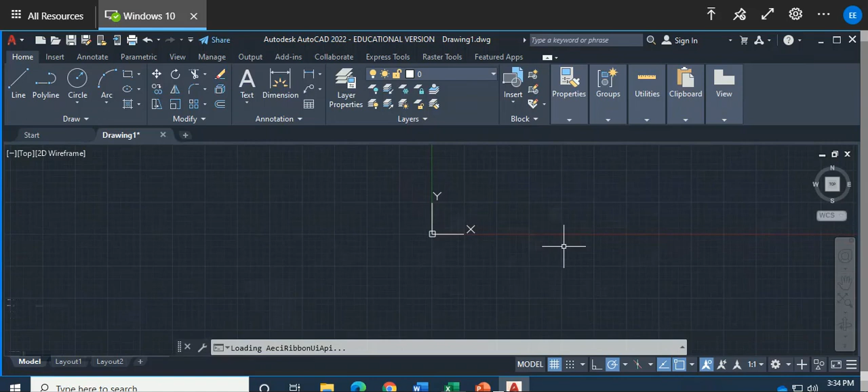Please make sure you're using inches as a unit, and also bring your reference point to 0 by dragging your cursor, pressing the thumb wheel and dragging the cursor in front of you, in the middle of the screen. This is really very helpful. If you start from the 0 point, and if it is in front of the screen, you're going to be much more comfortable and a better designer, no question about that.

Normally, the reference point is at the lower left-hand corner, and that's not the way people start drawings. We are more comfortable starting from the middle of the drawing area. So my XY axis intersection is right in front of the screen.

Now I press the thumb wheel and keep it pressed, and I drag it in front of me. If you press the thumb wheel, you'll see a hand - that's an indication that panning action has started. So you're literally panning left and right, up and down, controlling your virtual space. It's very important you develop the habit of zooming in by rolling the thumb wheel forward, zooming out by rolling it backwards, or pressing the thumb wheel and panning left, right, up and down.

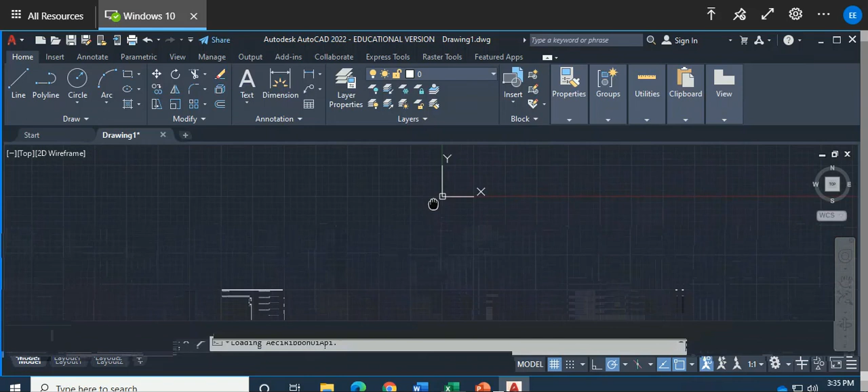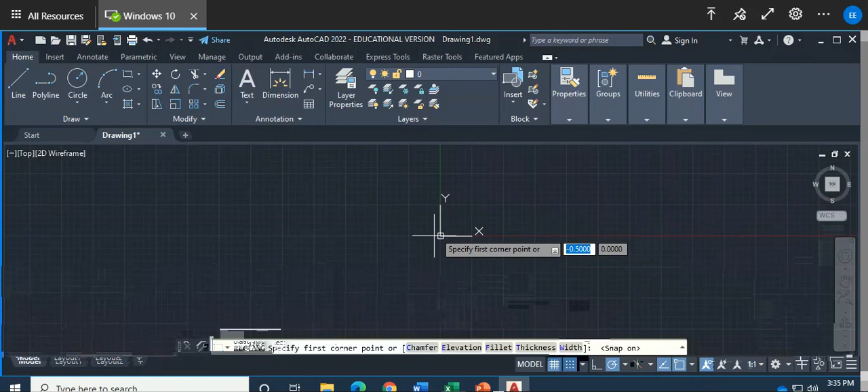So having said that, let's go to the rectangle command and start your rectangle from the 0 point. Right now my object snaps are off, so I turn on my object snap and my grid. I move my cursor right to the 0 point and it automatically shows me.

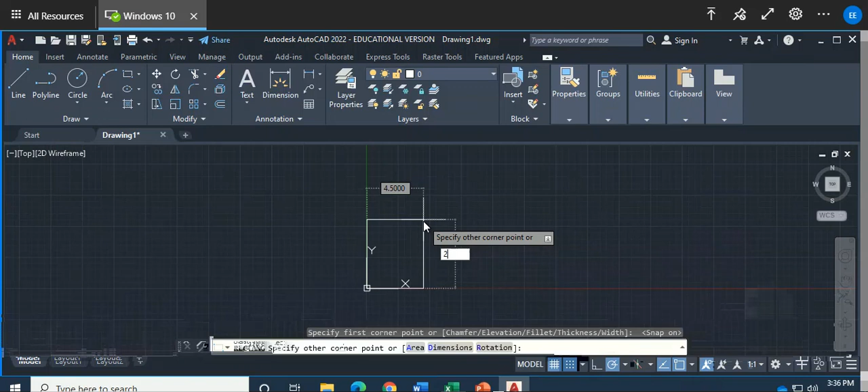I'm going to type my first name here using text. At the Home tab, there is a text command right here, and I picked the multi-line text option. I picked the top left corner and the lower right corner.

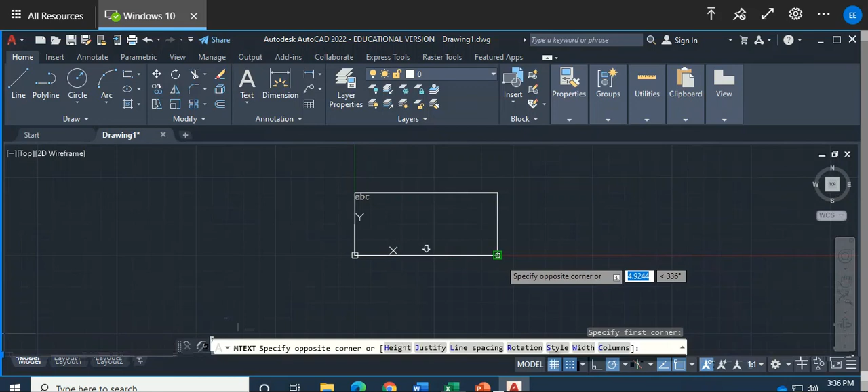Now the computer gives me a bunch of options - one is the lettering type, and the other is justification. You want to go with the center justification, and the vertical justification should be middle center. So go to middle center, both vertically and horizontally select the center.

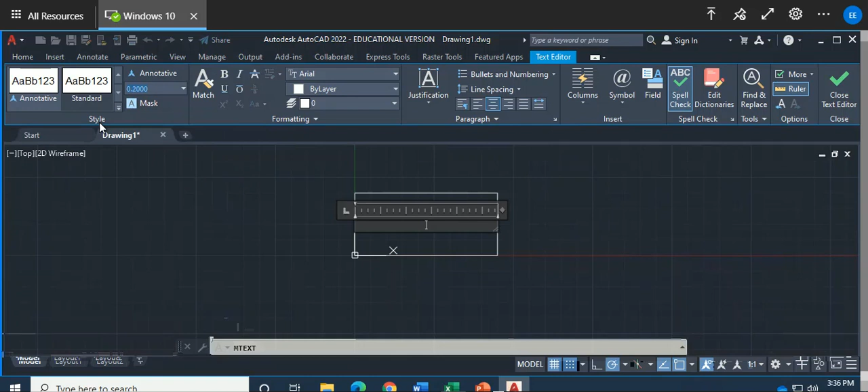We can also choose the lettering size, and I want this lettering size to be probably 0.2 inches, but maybe I'm going to change it later. After pressing enter, I am typing my first name in capital letters, E-M-R-E, to see how it goes.

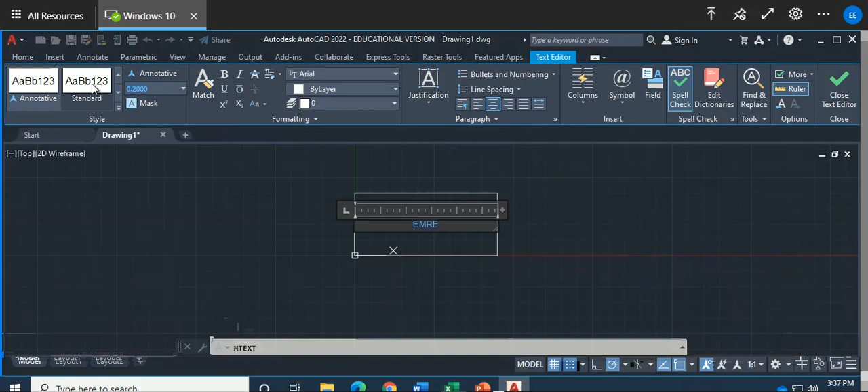After changing the size, I want to type inside the paragraph E-M-R-E, and that is kind of small. I want it to be larger. So I selected the total letter and went to size, making it 0.5 to see what it looks like. This is much better.

How about 0.75? Okay, I changed it to 0.75. How about 1 inch? I only have 4 letters. Maybe this is good, maybe this is good, I don't need too much.

I need bold face letters, and that will help. Okay, I think I like it. I think it will work for me. And close the editor. Okay.

This is good, but we're not even halfway yet. So what we want to do is make it more stylish. Maybe we're going to use the fillet command. Fillet is a very useful command to make the corners round. That definitely helps if you select the fillet command.

Select the corners to make it rounder, and the computer gives you an interactive system. As soon as you click on the fillet command, it gives you a bunch of options. One of them is the selection of the radius. So if you click on the radius, you can designate, turn off the object snap, okay.

You can designate where the fillet radius should be by picking 2 points, click and click, like that. Then select line number 1 and line number 2, and enter again. Click, fillet comes back, and then you do that again, and enter again. Fillet comes back, and then you simply draw, select. Something like this. You can use it, and now we're kind of ready.

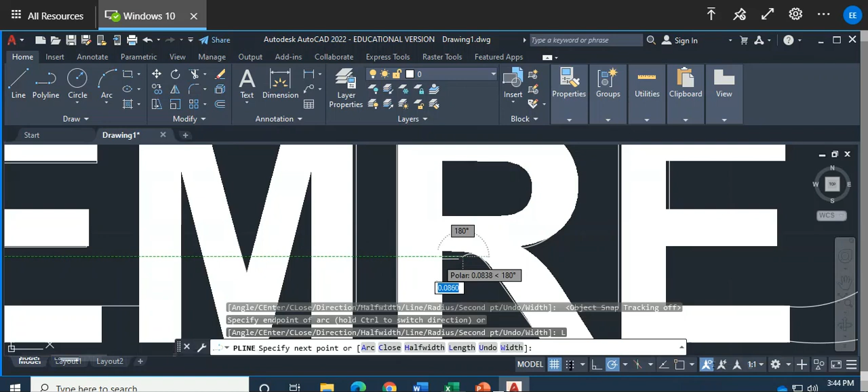And then switch to the line command. Then I feel like I'm going to do some modifications here later on. Come back here and come, okay.

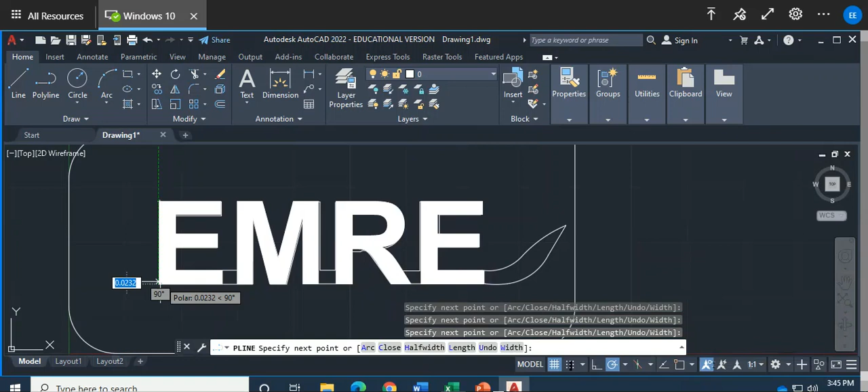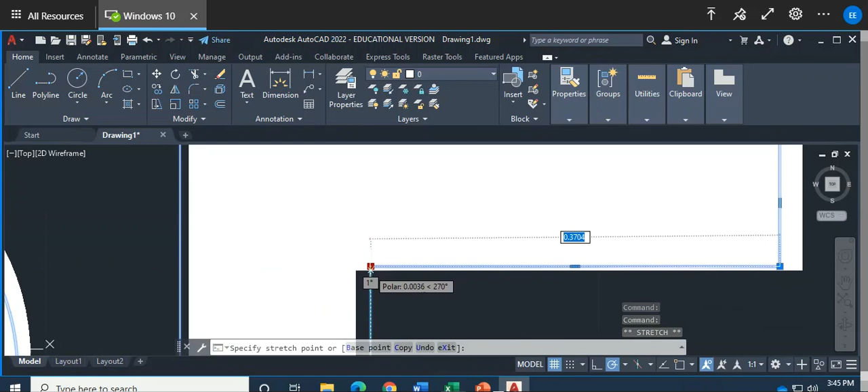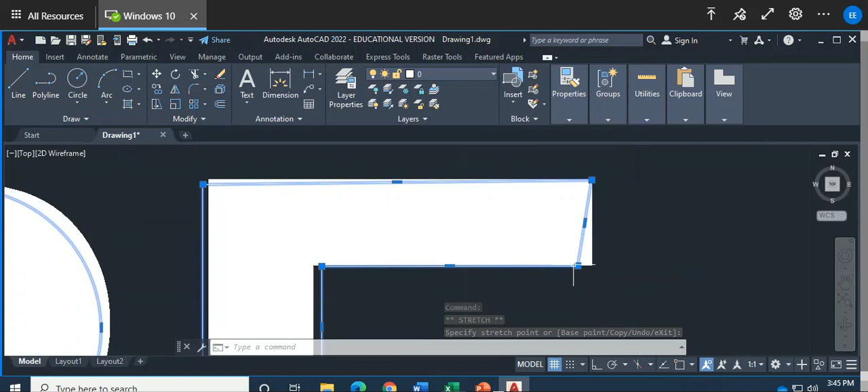Because it's a polyline, I'm going to end with the C for close. Now let's fix anything we can, and there's plenty here and there. If you selected the line, click on it, and the computer gives you the control points. Control points are the ones you can change, modify, and extend. You can click on them, they turn red hot, and then simply put them where they're supposed to be.

When you zoom in, you can see small errors better, and then you can modify it.

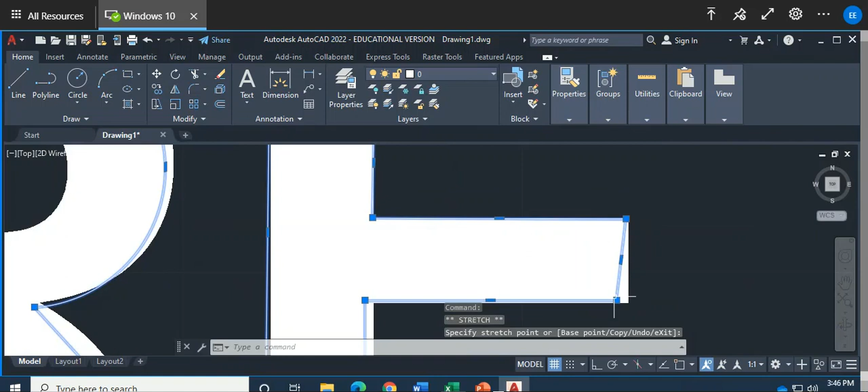You can also change it, it doesn't have to be exactly the same. You can also change some of the lines or angles of the lines to make it look more stylish.

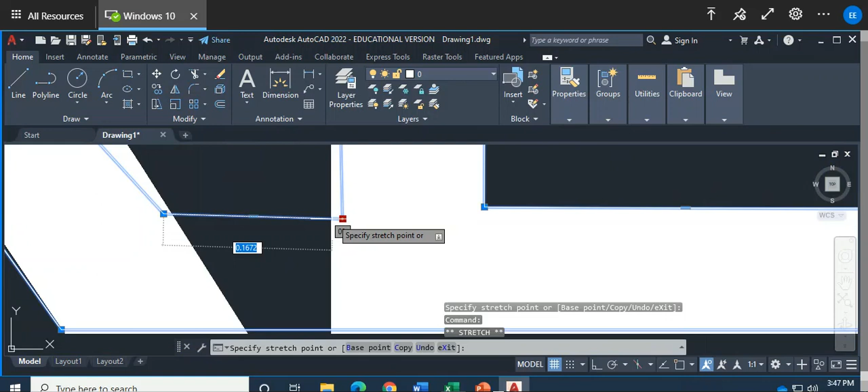Control points is pretty much everything. You click inside the blue control points, it gets red, that means you're ready to modify it. Click again, go to the place you like, and you can pull it to any place.

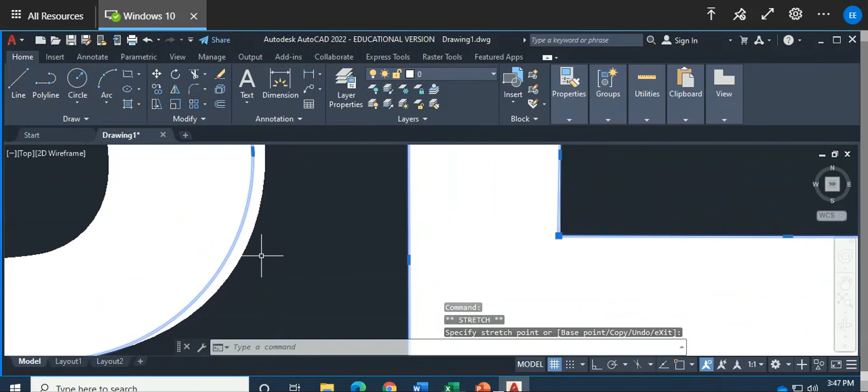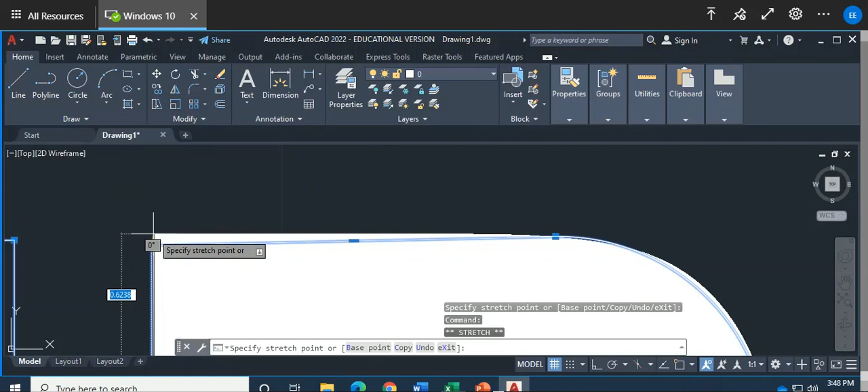Because this is an artwork, it's okay to exaggerate sometimes. You don't have to be accurate, but if you make it look better, that's the whole point.

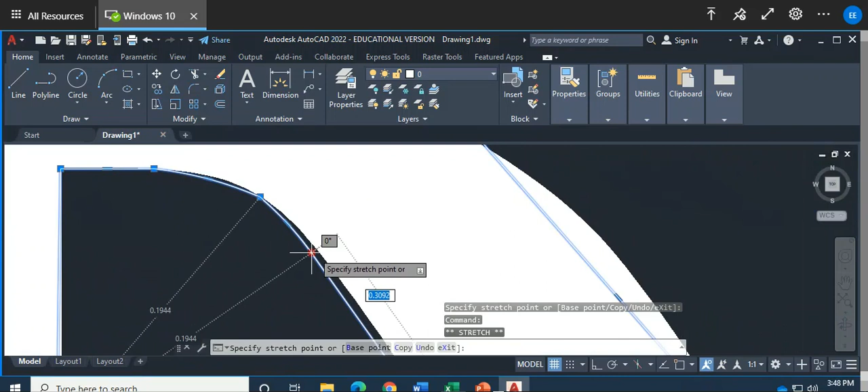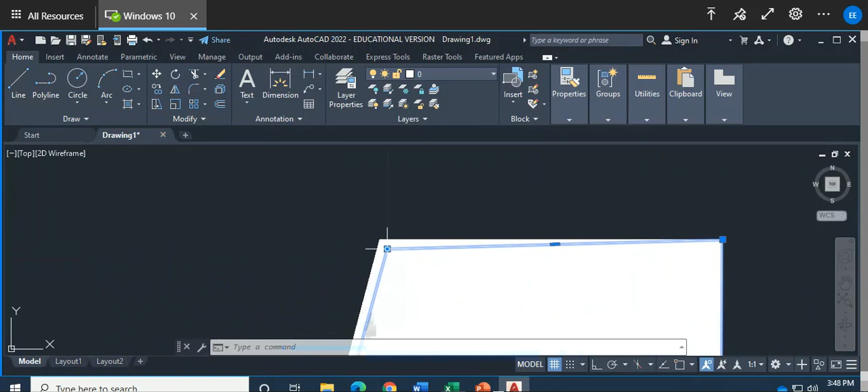Now, probably the students who are into engineering are a little bit confused. Why is it artwork if it's an engineering work? If you're an architect or engineer, or going into the architectural or engineering field, there is always the role of art, aesthetics, and proportions, aesthetic appeal in the world of engineering as well as art. And colors, the effect of colors, human psychology, being likable, is extremely important for engineers and architects as well.

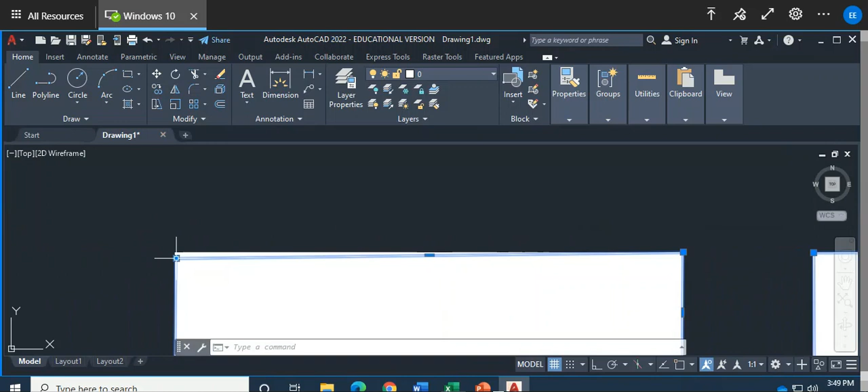So don't be confused that when you hear the word art, actually it's a good word, because there is a beauty that eyes are searching for in every single product, and you have to be aware of that fact and then try to do your very best when you're designing something totally new.

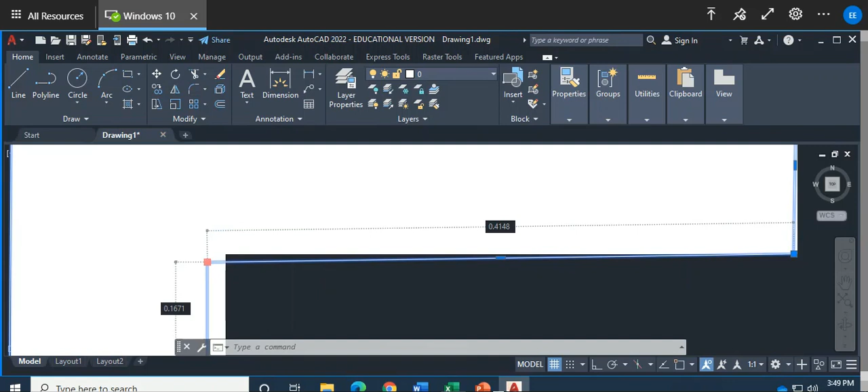Now, what is the next point? After creating those lines, how are we going to do it?

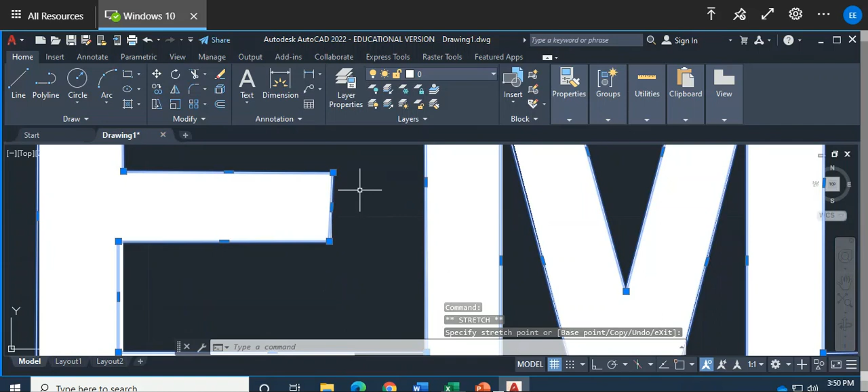Now, for the laser engraver, there are two kinds of approaches. We can create AutoCAD drawings within the laser engraver software and send it to the laser. Another thing we can do is create raster image files inside AutoCAD and send it to the laser. Both of them are possible. Raster file pictures are image files, as you know, and AutoCAD drawings are vector files, engineering drawings. Both of them work nicely with the laser engraver.

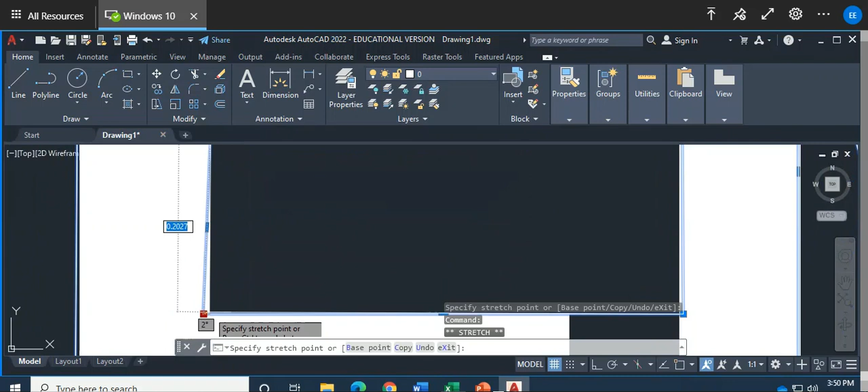You can try both of them. And from inside AutoCAD, you can generate a raster image file as well.

So we have it, it looks like this. I'm going to, before I erase the lettering, because the lettering will be gone pretty soon, start coloring the entire background. But before I do that, I'm asking myself, what else can I do to make it a little bit more interesting?

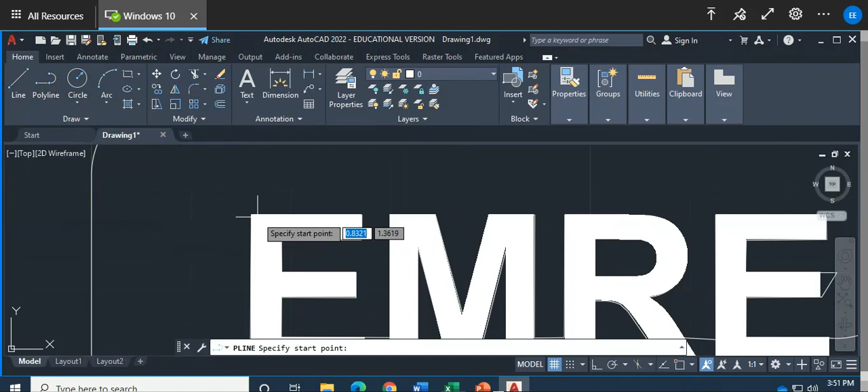Perhaps we can draw, we can start from the top. We can use the object snap to engage the polyline command, click, and go a little bit straight, then change to arc. Select the second point of the arc and the third point of the arc.

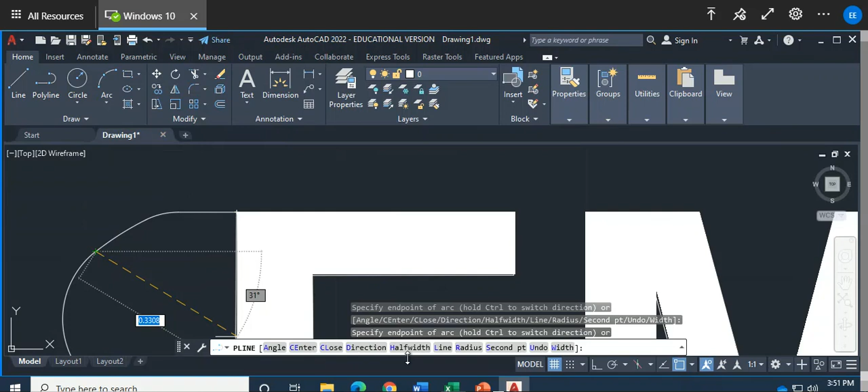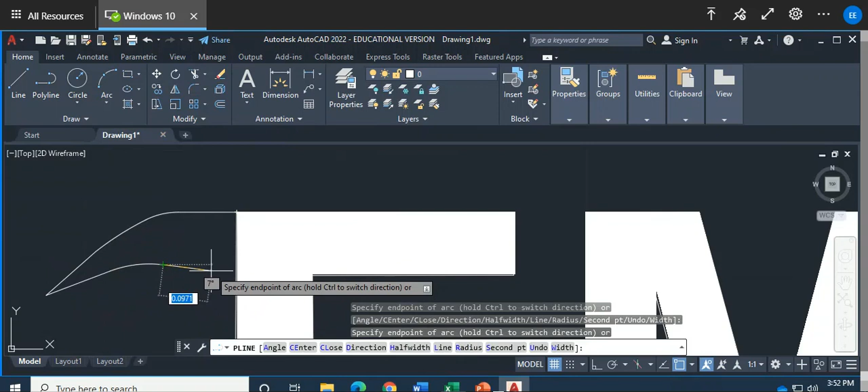You can switch to the single line command again to make it a little bit more stylish. And then go to the arc command if you like, select the second point of the arc and the third point of the arc, and then engage one of those. Enter. So far so good.

Basic lines are there, and this is the point where I'm going to erase. Don't forget to save your work, obviously. You always go to A, then Save As, A for AutoCAD, Save As, and select it to Laser Engraver, and go to OneDrive.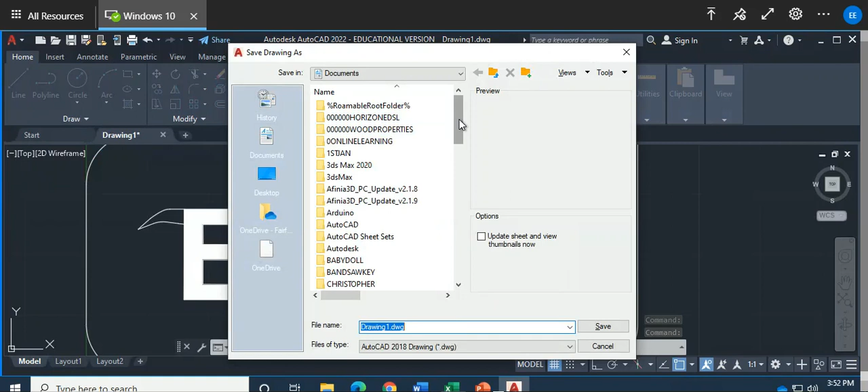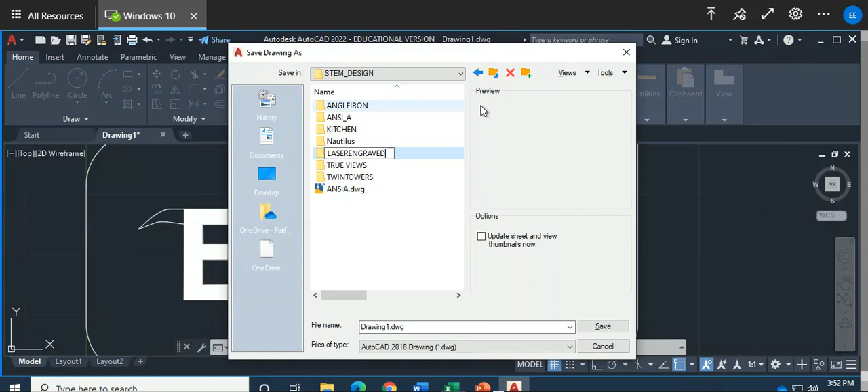Go to OneDrive, go to your folder that carries your name and STEM design, and create a new folder if necessary. So this is laser engraved. Let's make a new folder just for laser engraved projects, we're going to have several of them this year. It's called laser logo.

Save. All right, so here it is, and I'm selecting the letter.

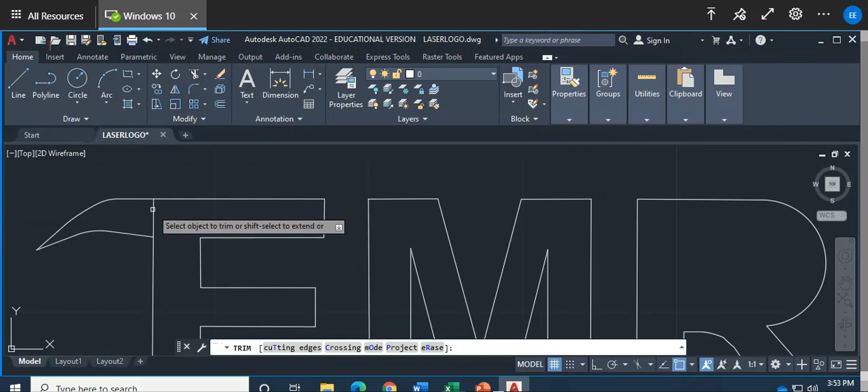Click on the letter and delete. Okay, and there is an area that I like to trim off. There's a nice trim command somewhere. That's it, I can click on this and it's gone. Save again, of course, since I modified it.

Am I missing the middle of the R? Yes, I am. Control Z takes me back. Control Z.

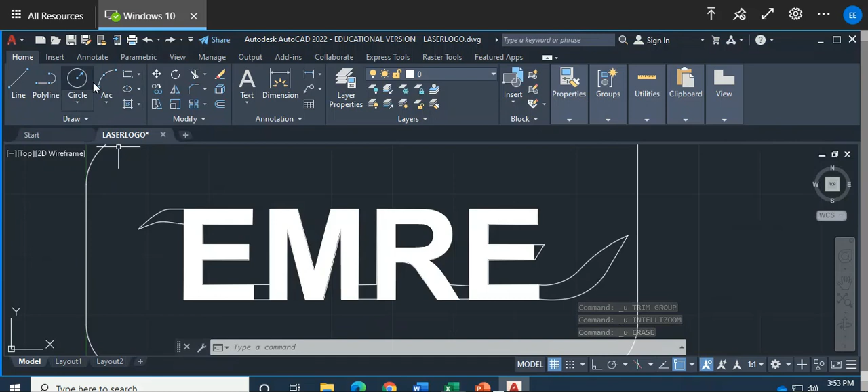Let's create the middle of the R as well. Again, I'm using a polyline. I'm so comfortable with polyline that I have no problem using it. But if you feel comfortable with the regular line, you do it. But I suggest you learn the polyline.

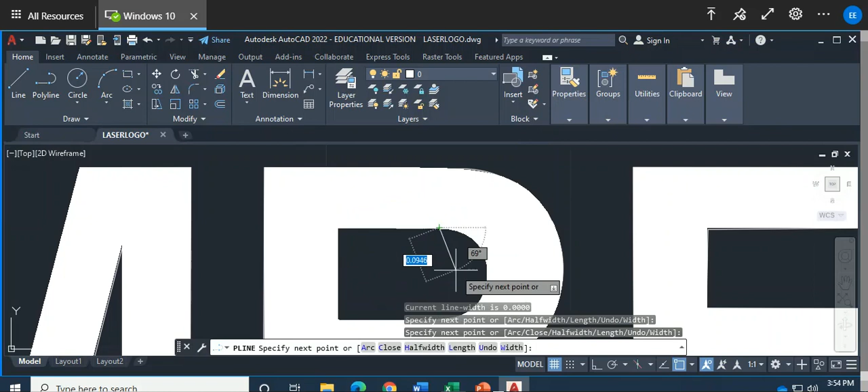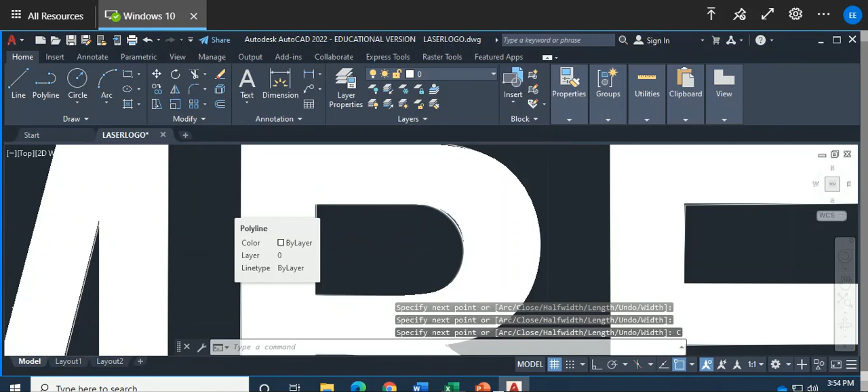Okay, and I think we're ready, and save, of course. Now we can go erase. The lettering, select it from the edge, click on the edge of the lettering, it's gone. And you can modify it. You can go there and click on the surface, and you can turn the ortho on so that you know what you're doing.

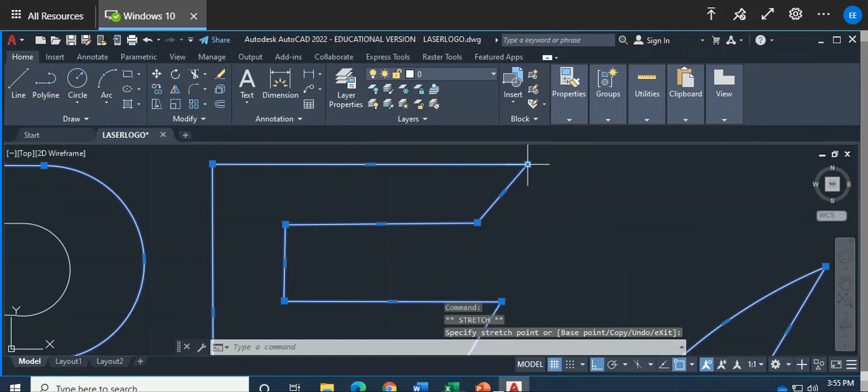Okay, so it makes it a little bit more stylish, and you can go like this, you can go like this. Okay, and escape. Maybe you need a trim command, maybe you go ahead and use the trim and cut this end as well. Okay, and escape.

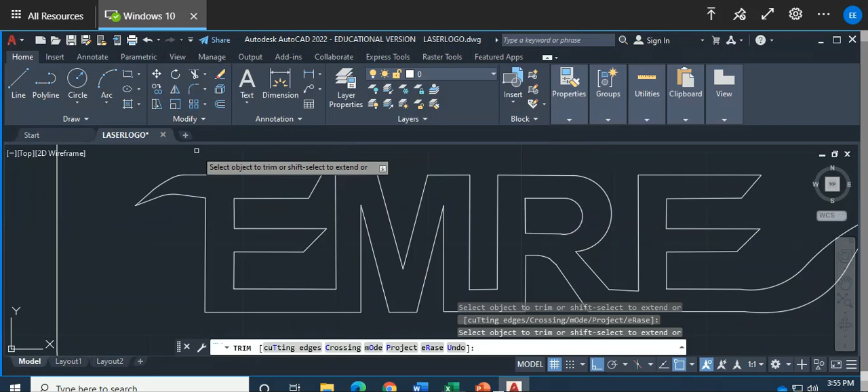And save your work. Okay, now we need the color inside. One of the interesting things about the universal laser engraver we have in the shop right now, in the CNC center — it's called CNC center, not shop anymore. It used to be shop, not anymore. CNC center requires red color for deeper cuts. And how do we do that?

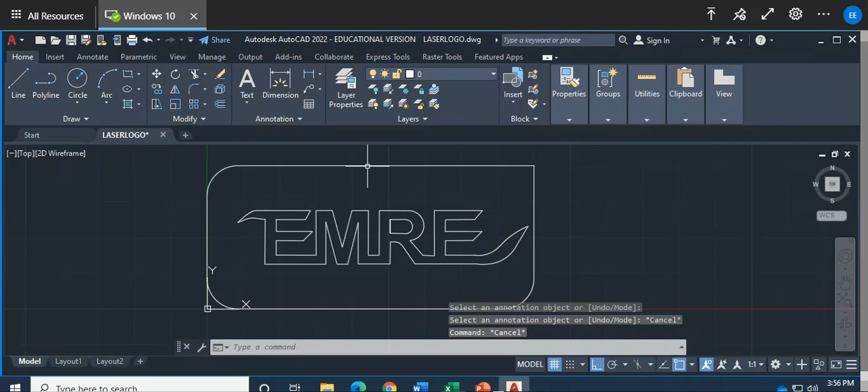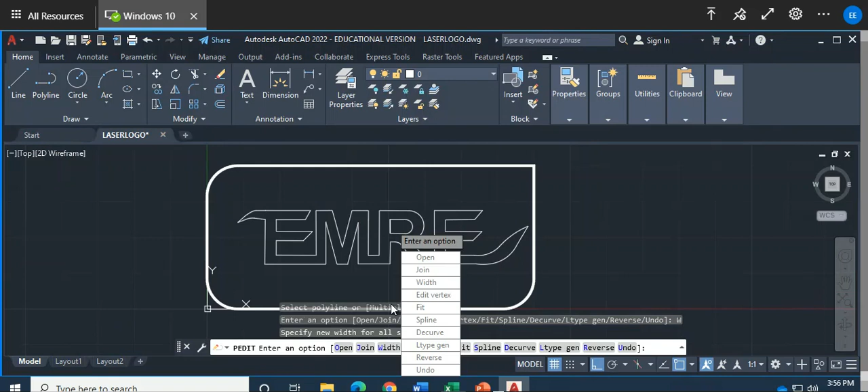First of all, this line is a polyline. I want to make it thick and red. So let's go DD edit command, dynamic dialog box edit command. And I select, okay. I'm sorry, P edit, polyline edit command, and we select the area, okay. And we want to change the width of this, and the width is going to be, say, 0.03. Is that good? Yeah, that's good.

And also, what else can we do? We can change the color to red. So double click it, click on it and you need the properties. You need access to the properties, and within the properties, you want to change the color to red. Red actually means cut, so I'm changing that to red, okay, and save.

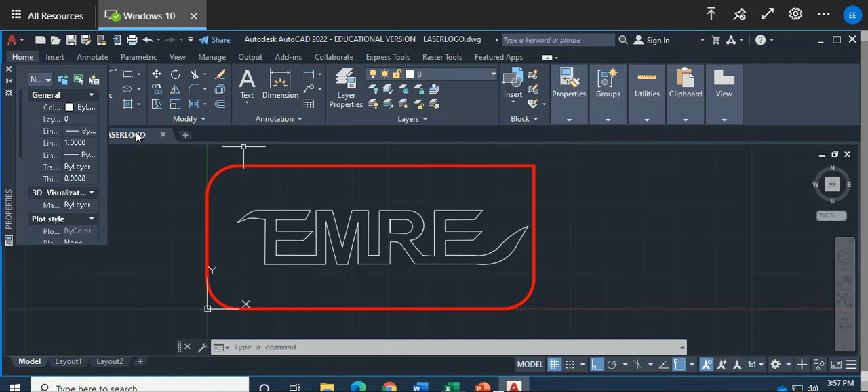So inside the lettering, maybe green is a good idea, and so that's what I want to do. Then go to green, select. But how do we do that? So I'm going to just get rid of this properties box, and I will just use the boundary hatch command, or B hatch command. I select the solid command, use the color, select the green color, okay, and click inside the area. Ta-da! It's beautiful.

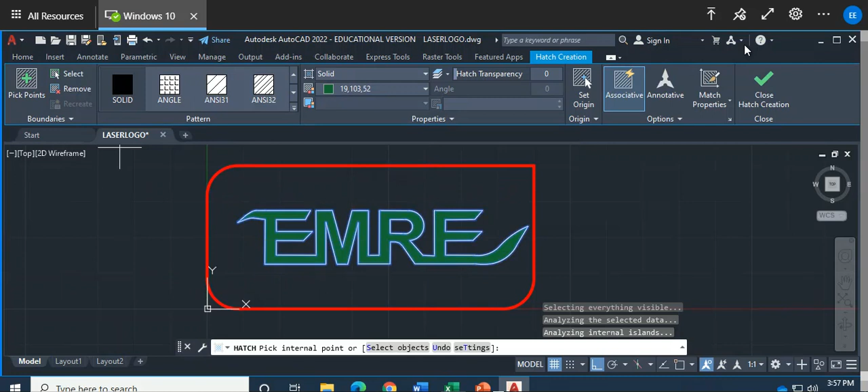Now, okay, click on the check mark on the top right-hand corner, okay, and save your work again. Now this is the AutoCAD drawing file, okay? And it's not centered perfectly. It's very important in the design world, architectural engineering design world, or even artistic design, centering something — or even commercial art. Centering lettering is very important.

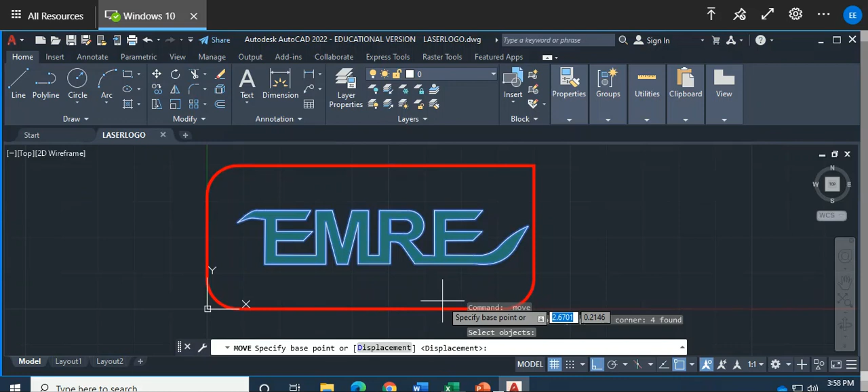So I'm going to use the move command to center everything more evenly, okay? Click and move everything. I have the ortho on, so I'm moving everything horizontally, a little bit to the left. It's too close to the right, so perfect. This is better. Save again, okay?

And this is, I think, almost ready to be laser engraved. This is a drawing file when you saved it, and you can export it also as a JPEG image file. That's also possible. And how do you export it to JPEG image? That's a good question. Click on the A, go to export, okay, and then — is this a CAD drawing? Is it other formats? We're looking for the JPEG image.

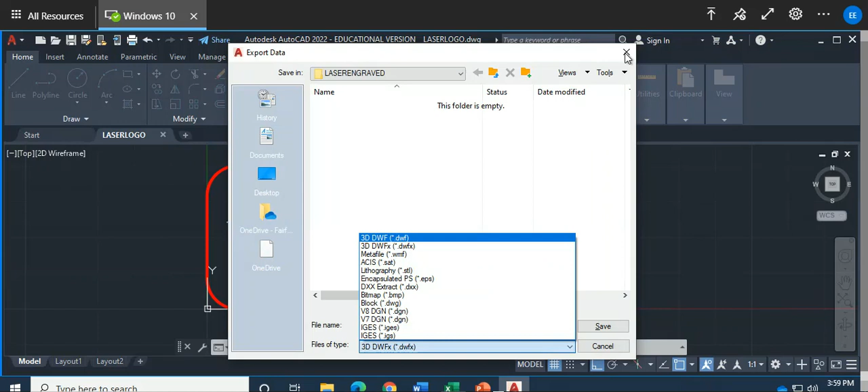I'm looking for the JPEG image file, and I don't see it here. There's a BMP file, but not a JPEG image file. There's nothing. Okay, so how else do we do this? There's another way, more than one way of doing this, and the JPEG image file can be completed.

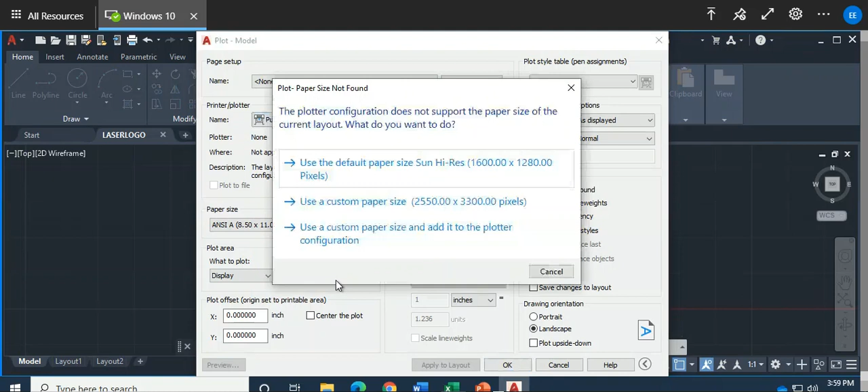Go to print commands, click. When you're in the print menu, look at the down arrow here - JPEG image printing. Yes, right there. Okay, use default size, and display or extents - yes, extents. Okay, and we're going to use this for...

So we want to preview first. Click on the lower left-hand corner to preview. It's going to look like that. That's not too bad. Yeah, if the laser cuts it alongside the red lines, we're going to be in great shape. Okay, but I wish now it's okay.

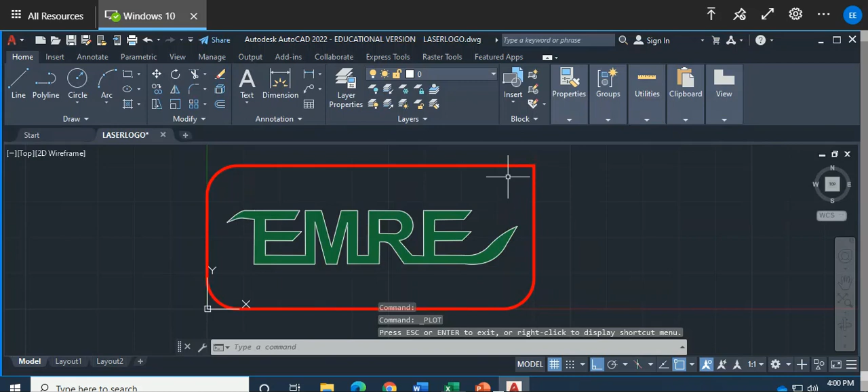I wish I had a hole here at the center - that would have been so nice if we had a hole. I'm glad that I saw it by previewing it. So maybe I should add a hole here. I'm escaping, coming back to here, and a hole would have been nice.

I go to circle command, okay, and pick the corner. See if I can create a hole. Something like this. Actually, move it a little bit down to where it is. That would have been so nice.

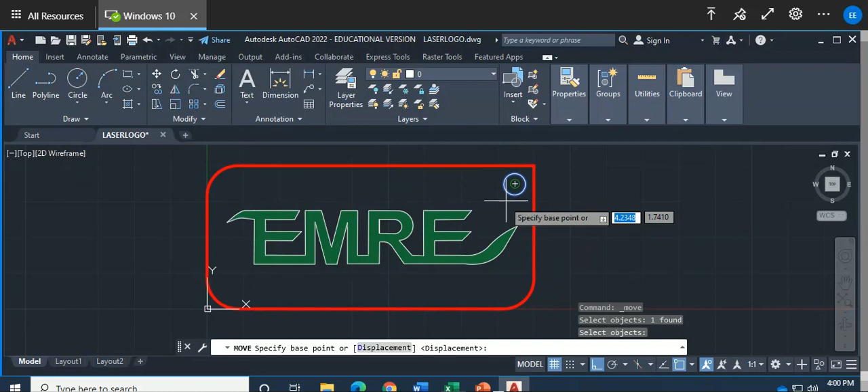And I'm going to turn off the ortho so that I can more freely move. That's far better. Okay, or do you think I should put the hole right around here? That would have been nicer. Yeah, click here.

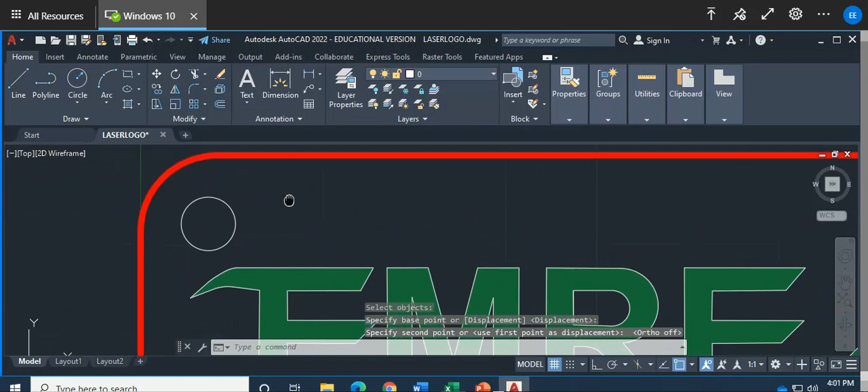How do I change the color to red again? Back to red again. First of all, is this a polyline? Let's check the computer to ask, is this a polyline or can we make it a polyline? Click on this, enter, and select the polyline - it doesn't see this as a polyline.

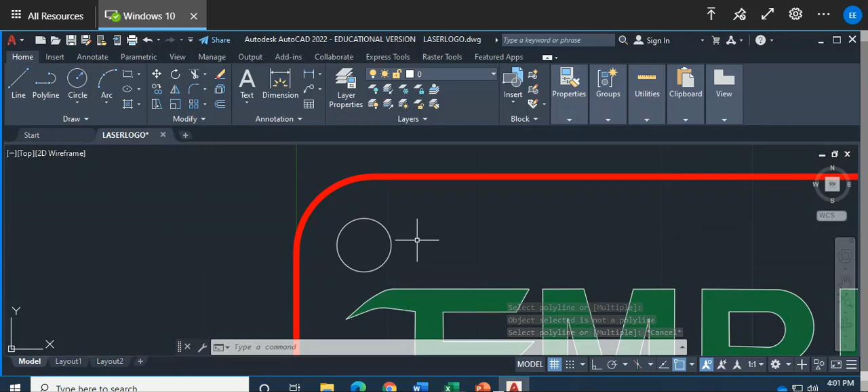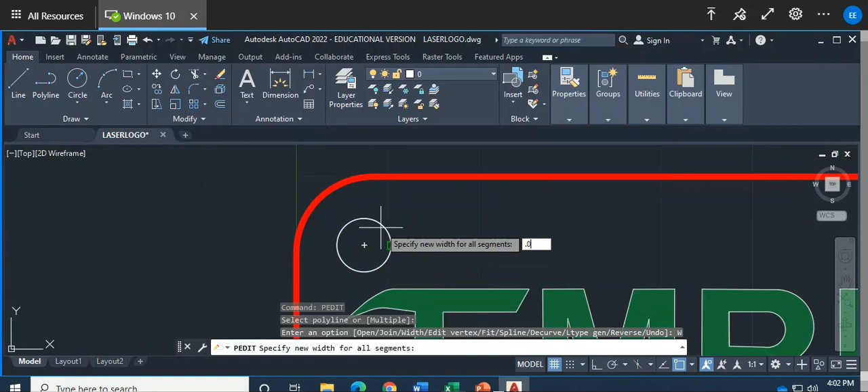So to make it poly, let's type BPOLY or boundary poly, enter, and pick a point inside, enter. Now it's a polyline. Then use the pedit command, polyline edit, click on it, and select it. You want to change the width of this, and the width is going to be 0.03, like we used before - very good, enter. Now you want to change the color to red so that the laser cuts it, okay?

Click on it, and go to properties - how do you go to the properties? Double click, and we go to properties. Okay, this is done already, let's get out of here, and again, click, double click.

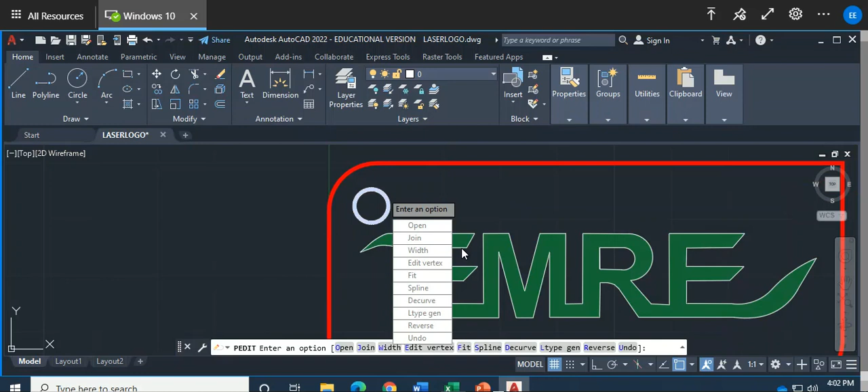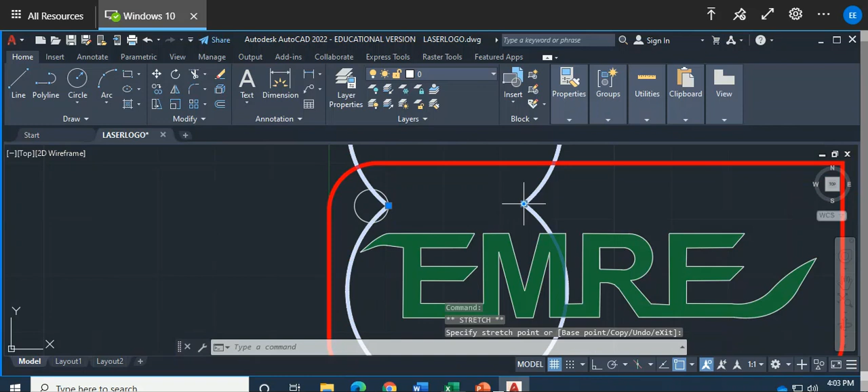Let's see. Okay, one of those options of polyline edit is not happening, so let's save this first. Okay, and I'm pressing the right mouse button, and then see if I can change it. I certainly want to change that, but not that.

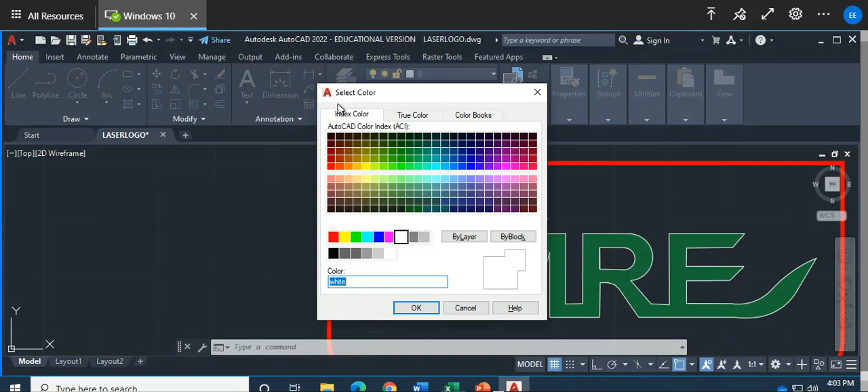It's in a different layer, so I'm going to go to the layers and see if I can change the color to red. So, layer properties, and make it red, and see how it goes. Okay.

Okay, so save command again. I think this is ready, and it's been saved as a drawing file.

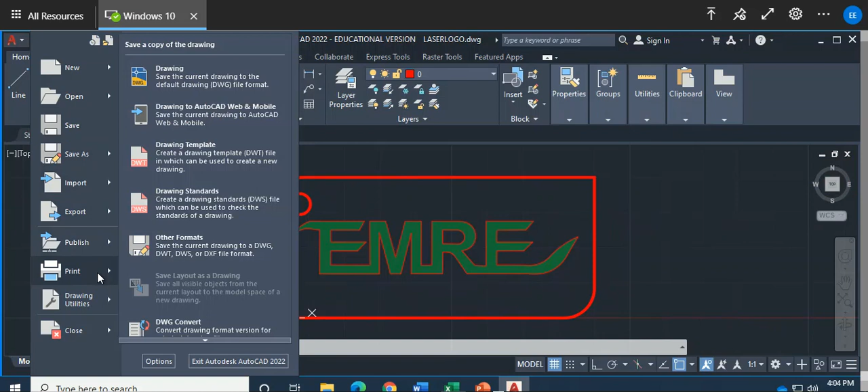Now we're going to export it to a JPEG image file. Let's go to A, all right, and print. And the printer plotter - change your printer plotter to JPEG image file, JPG file, okay.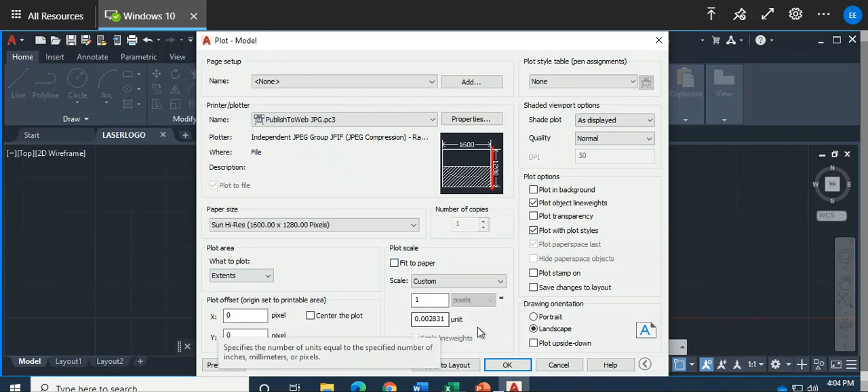Use default paper size, okay. Instead of display, plot the extents, and instead of fit to paper, it should be full scale, okay. You want to preview it, okay, continue. Okay, I think this is good.

And now okay it. Now the computer is going to ask you the location - the annotation scale is not equal to. Let's continue. Okay, now where do you want to save it? Again, you go back to OneDrive and find the proper folder.

And laser logo, and save it. Ta-da! And now you have the picture also. Okay, thank you very much for listening.

And we're going to use this information later on. Then when the printer laser engraver is ready, when I receive the acrylic sheets, we're going to print your design. Okay, and don't forget to design a sketch on a white blank sheet of paper. We call this a brainstorming session, and you have to have options - like 5, 10, 12 options to choose from, not just one.